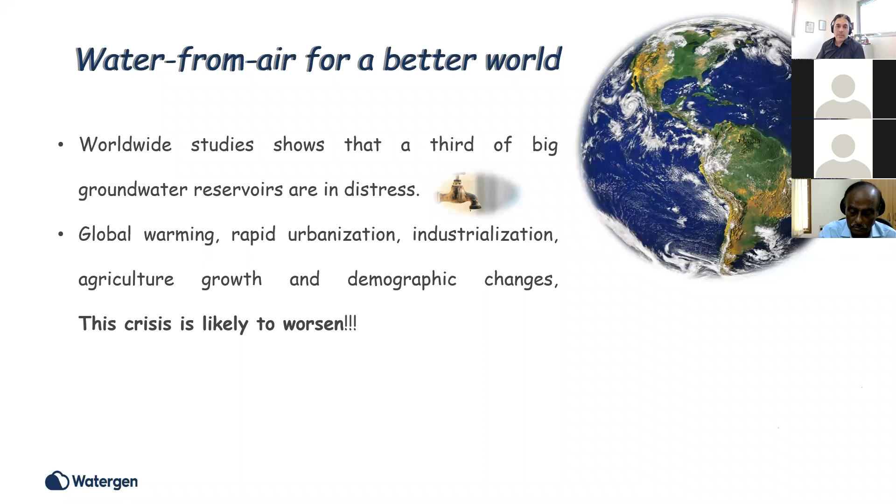This leads me to the presentation objectives. We will overview water sources, and of course we will talk about water from the air, potential hazards in the air, on the ground reservoirs, and regulatory aspects associated with AWG. We will speak generally about different methods of AWG technologies, and finally we will talk about customizing water upon demand.

So let's briefly scan the conventional sources of water we all take advantage of. You probably know that 1.7 million people die annually of water-related disease, and this is very unfortunate information. This finding is not surprising given the problem we addressed just now.

As we speak, natural sources of potable water mainly include mineral, spring, and artesian water. As we already agreed that these sources are distressed, in the last 25 years people increasingly rely on purified, desalinated, deionized water as their source. In fact, these sources are becoming controversial as a result of carbon fingerprint and salination of ground sources. Still, including purified water as an additional source, a third of the world nowadays consumes unsafe water.

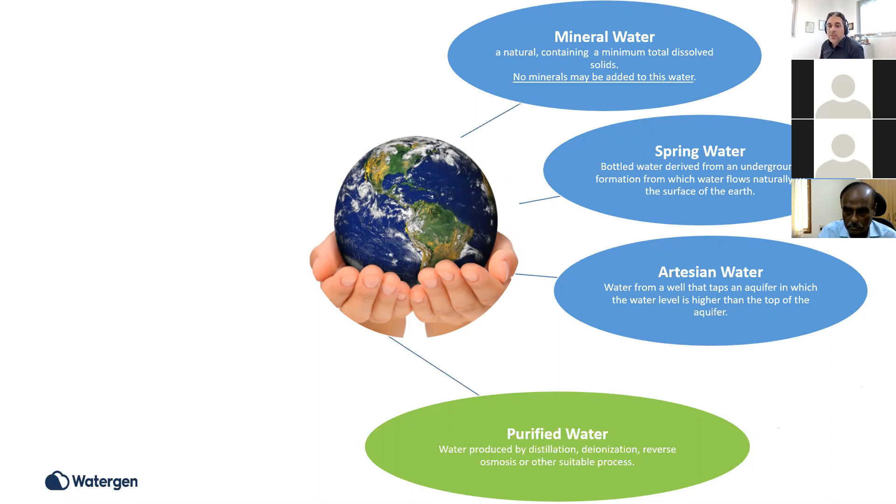So what else can be done? The solution relies in the atmosphere. This available and important source is part of the hydrologic cycle that we can use for humankind's benefit. So to better understand this part of water from air, let's first talk about the magical hydrologic cycle.

The hydrologic cycle is the continuous movement of water in the air, on the surface, and below the earth. This dynamic process allows, at any time point, some estimation says that it's 13,000 cubic kilometers of water at a given time point.

So given the balance between the water above and the water below, we can get a steady state in our atmosphere of renewable fresh water.

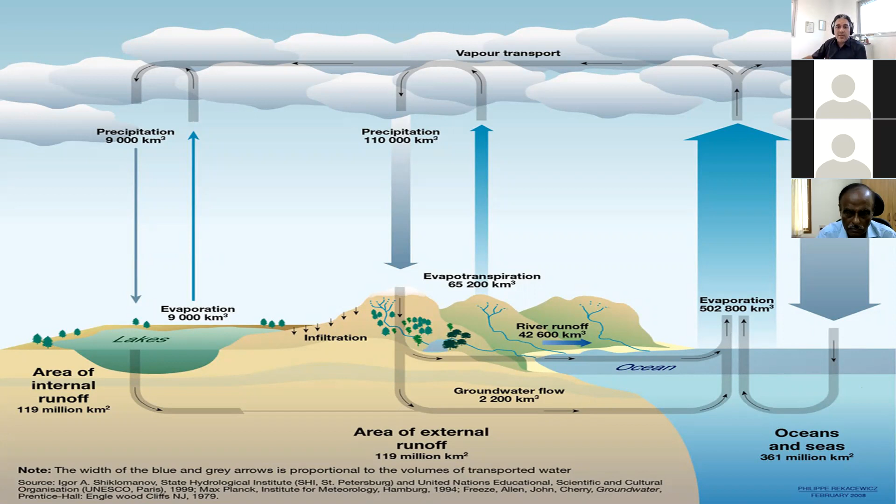Please pay attention also to the fact that the earth acts as a gigantic distiller, and therefore it's obvious that the amount of contamination in the humid air is low by several orders of magnitude when compared to the pollution coming from surface and ground reservoirs that continue to accumulate contamination. So allow me to highlight these three important aspects before we go.

So the advantages of atmospheric water are very low accumulation of pollutants. This is a cleaner source. It's a renewable source, and it has no effect on other water sources on the ground.

So from a strategic point of view, several years ago, Watergen globally surveyed the need.

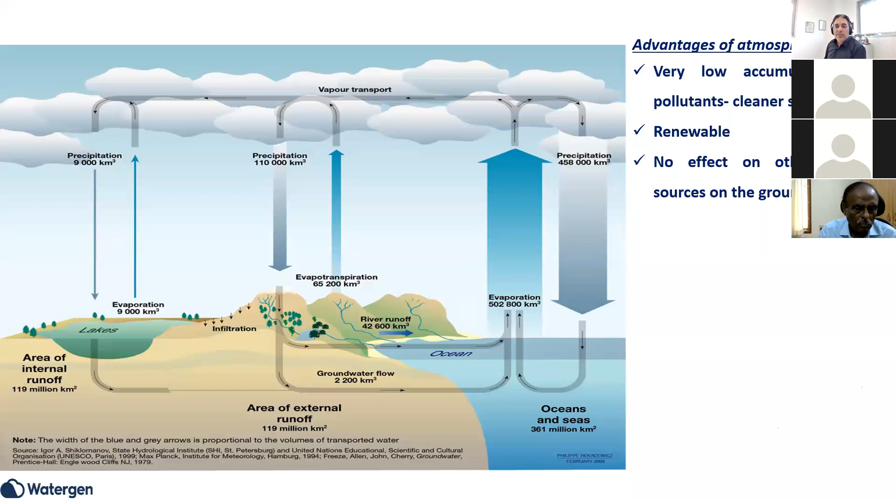I'm sorry, do you hear background noises? Okay. Yeah, we can hear you, no problem. But there is some interference in the background of my noise.

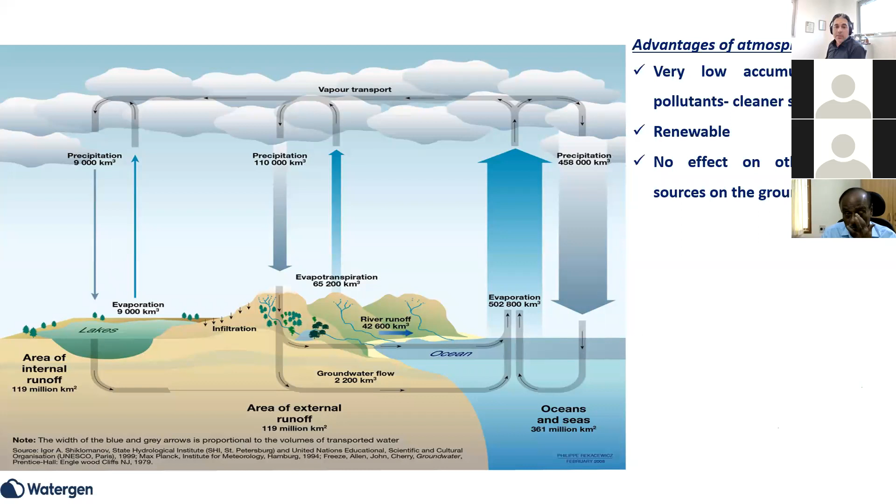Never mind. From the strategic point of view, several years ago, as I just said, Watergen globally surveyed the needs for AWG. The surveys also included technological gaps between different water sources.

So the pollution is low, of course, while producing this device and while this device is working. In the case of tap, RO, and distillation, it is also low. However, keep in mind that there is a lot of infrastructure surrounding this whole case, and it leaves a carbon fingerprint. In addition, in RO desalination, the byproducts of greenhouse gas emission are relatively high.

In terms of water quality, all systems are high in quality. However, it's high in quality in the other sources especially when it goes out of the facility or the plant that treats this water. The infrastructure is the problem, because in the infrastructure you have welding, old pipes, deposits of organic materials inside, and deposits of byproducts of disinfectant that are administered into the system.

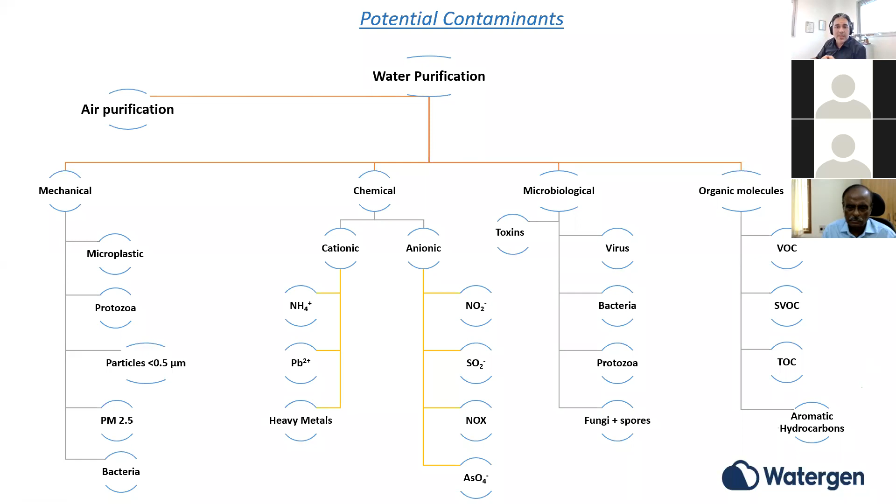We can find them seldom in places where the infrastructure is not treated well. However, we don't know what is the fate of AWG in this case, because we are collecting water from the air. Therefore, the next mission was to locate a list of contaminants that are associated with air pollution, and we went to the WHO list for that.

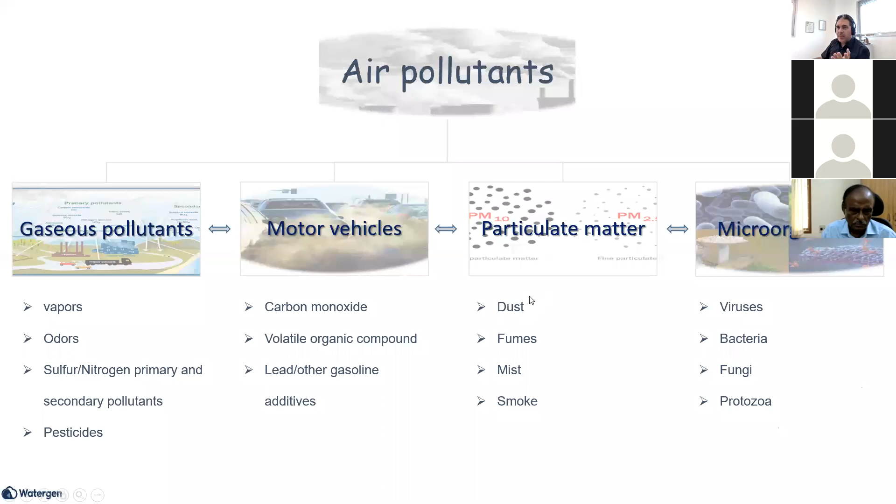According to the WHO, we sort contaminants into 4 major groups to keep it simple: gaseous pollutants, motor vehicle emissions, particulate matter, and microorganisms. Just as examples for each one, but pay attention to the fact that every group is connected to one another. For instance, dust is a vehicle to carry viruses and bacteria. It's also a vehicle to carry volatile organic compounds. The same thing applies to fume, mist, and smoke.

So the question that still remains is understanding the route of contaminants and its significance on potable water, which is still a conundrum in our case.

However, when dealing with AWGs, we have to define this framework differently, with special attention to these 4 major groups as far as I see it, which is the water safety related component finally monitored by the end point user. As an example, I believe many contaminants that are very likely to be found in the infrastructure of municipal or other systems are not necessarily related to AWGs. We'll discuss this later on.

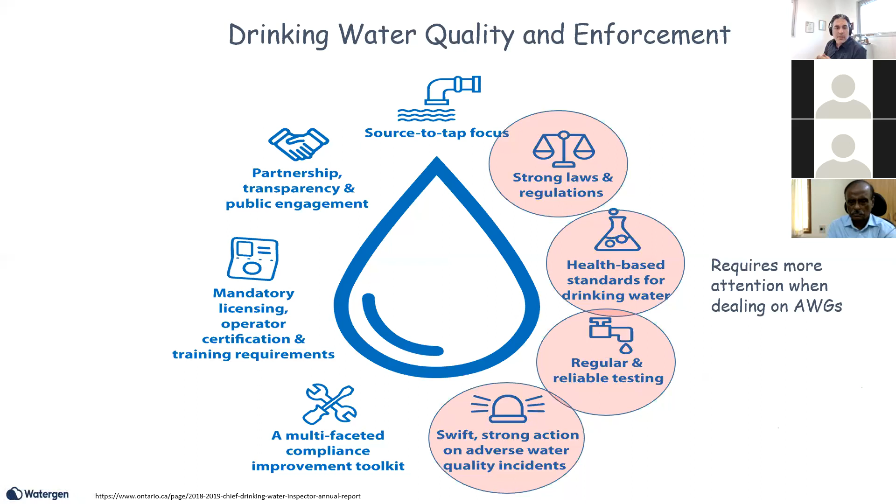And of course, there must be a real-time alert in the system to notify the user of any alarming issues that may appear. The next step was

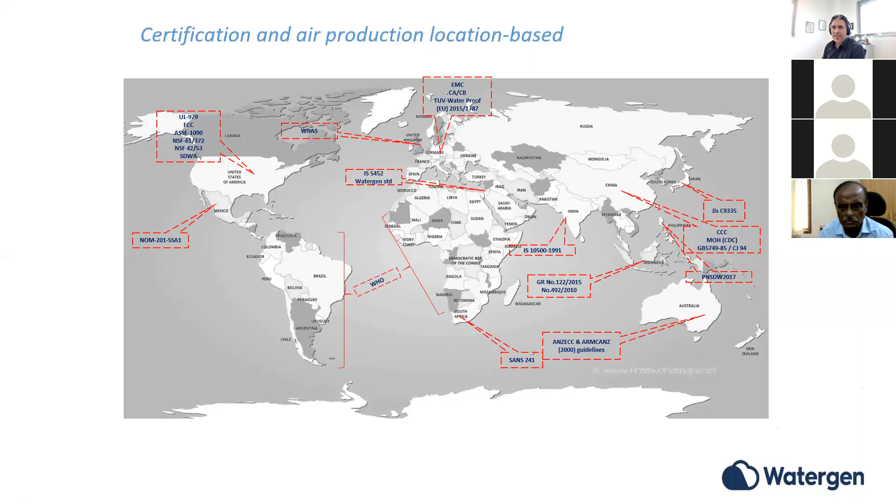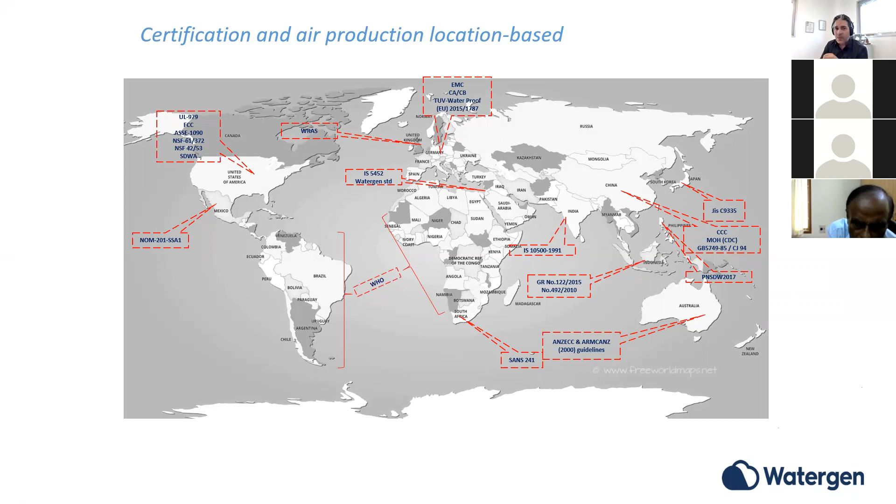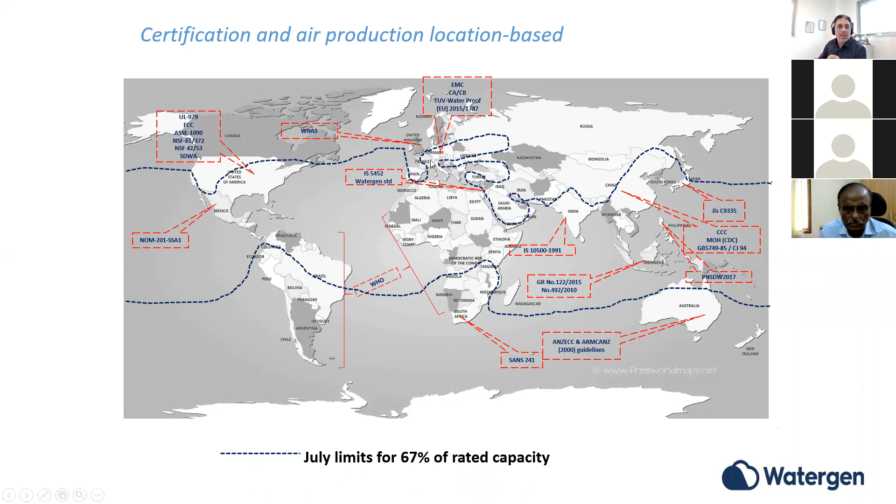to map the whole world in terms of standards. Generally, most countries align their water safety standards with international common standards, though some local variations can be found. This is very important because this finding gives us perspective about what contaminants are more abundant in certain areas. Therefore, we mapped the whole globe with specification to the area between the latitudes that allow water generation in summer and winter.

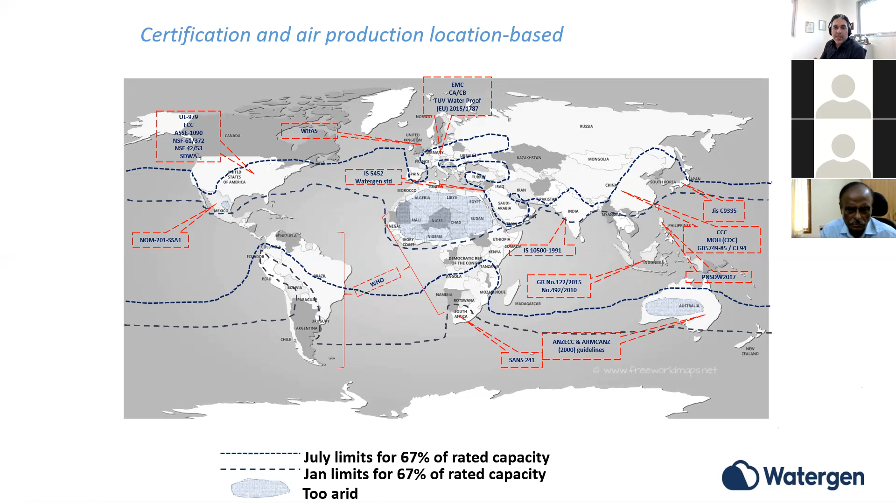We also paid attention to places that are too arid for AWG activities. So please note that our attention was initially given to places where AWG works. Finally, we ended up with a list of stringent requirements we call Watergen requirements, which serve as a thumb rule to approve our devices.

In addition, a lot of our attention was given to pollution, because of the different behavior of contaminants on the ground versus in humid air. For instance, to emphasize what I mean, heavy metals such as lead appear in different metallic or ionic forms on the ground versus organic compounds in the air. So the solubility is different, and this must be considered when thinking about regulation in the case of AWGs.

Another issue is bacteria on the ground or in reservoirs versus bacteria in the air, or other microorganisms in general. They may be significantly different and versatile on the ground versus the air. Therefore, it should be taken into account.

For instance, let's say we are now addressing the demand for tests. We have to think about what is the significant microorganism that best represents the conditions for AWGs as an indicator. And finally, as we said before, contaminant concentrations are completely different.

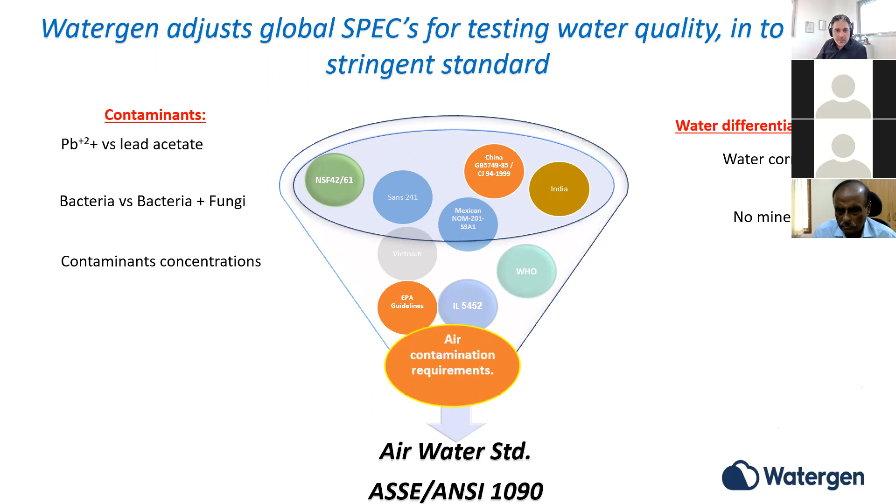A closer look at the standards reveals up-to-date knowledge related to AWGs and water safety, focusing on highly relevant aspects. We can see many aspects associated with safety, health effects, aesthetic effects, and more. But let me outline three relevant aspects that are new in this standard.

The first is oils, because most of the technology is based on mechanics of heat exchangers. These heat exchangers come from the metal industry, and they very likely have oil residues that in some cases can be toxic or unsafe for consumption.

Another issue addressed in this standard is corrosivity, because the water is corrosive as long as the machine is working. This corrosiveness may affect some wetted parts in the machine. Therefore, these parts must be tested carefully under certain conditions of acidity to approve their use in the AWG machine.

The last thing, and a very interesting one, is the energy efficiency, set by the standard to 3 liters per kilowatt hour, subjected to 60% humidity and 27.5 degrees centigrade. This is really about energy consumption, and many researchers believe that energy consumption is the Achilles heel of the system.

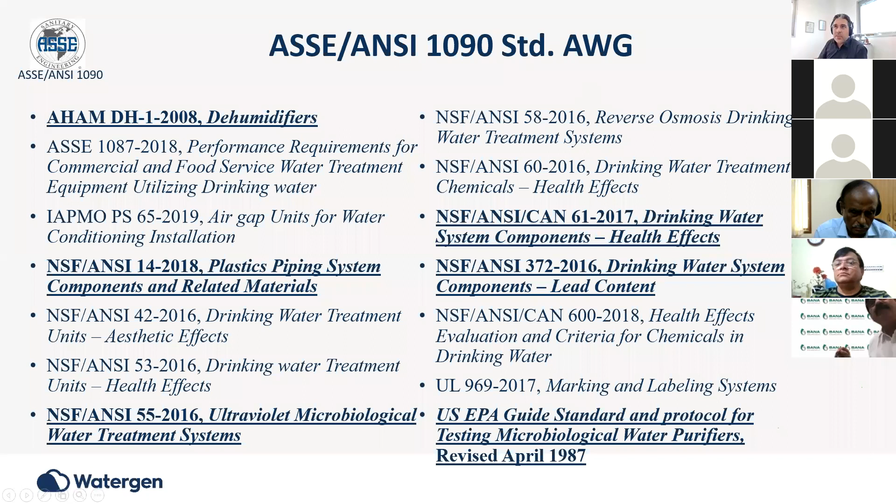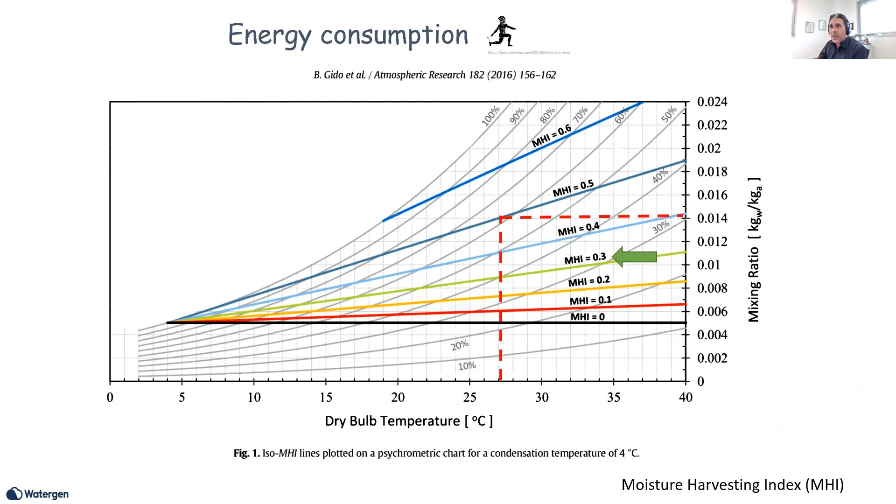Another important issue addressed in the work of Ben Gido and his group is related to the smart management of energy. To be efficient in water production, an AWG must work according to favorable conditions, which seems very reasonable, operating in different intervals depending on location and time.

Altogether, this also raises questions when dealing with standards. This means the system will encounter many stagnation points, and the way to treat the water in order to prevent biofouling is crucial when designing such a device. This should also be addressed when thinking about standards associated with water safety.

So with this knowledge in our toolbox, let's move on to the principles to consider in planning AWGs. I'm sorry, you probably noticed I made some changes to my presentation along the way. To better understand the principles, let's take a look at the big word we call AWGs, atmospheric water generators.

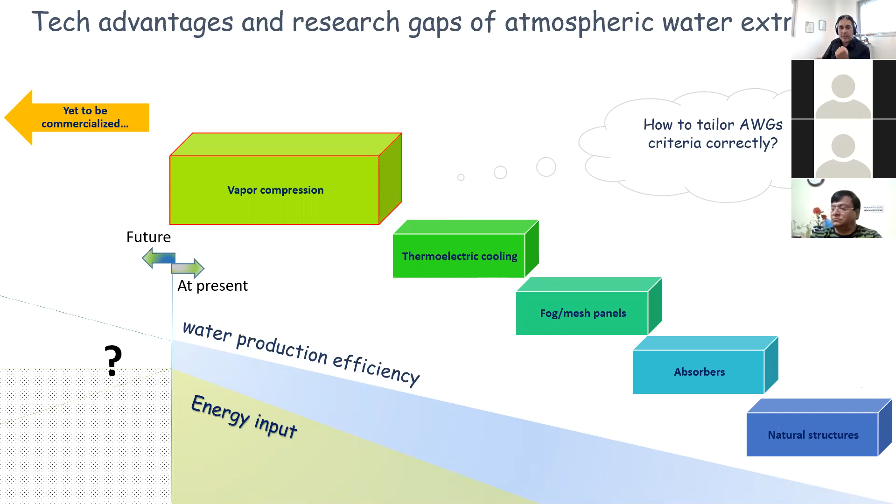The question is, when we understand that vapor compression is the major potential we currently have at market, how do we tailor the AWG criteria correctly? With this understanding, let's move on to the criteria related to vapor compression design.

We collected several aspects that relate to each other, starting with environmental conditions that must be taken into account in system design, such as air temperature, relative humidity, and dew temperature obtained from given environmental conditions. This also affects production planning, which will be carried out according to available weather, exactly as the group of Ben Gido showed in their work.

These aspects are all dictated by safety. As we mentioned, approved raw materials must be free from harmful chemicals, and all matrices must comply with corrosive water resistance. A safe production environment is a very important issue.

This is important for keeping the machine safe. As we know, most machines will be stored for long periods at times, and biofilm or other problems can grow in the machines. Therefore, a safe manufacturing environment is very important.

And of course, real-time alerts are needed to notify the user that something went wrong. As an example, there are also limitations to the vapor compression mode itself, because under 9 degrees it's not sensible to produce water, since the gas may freeze and there isn't much water in the air.

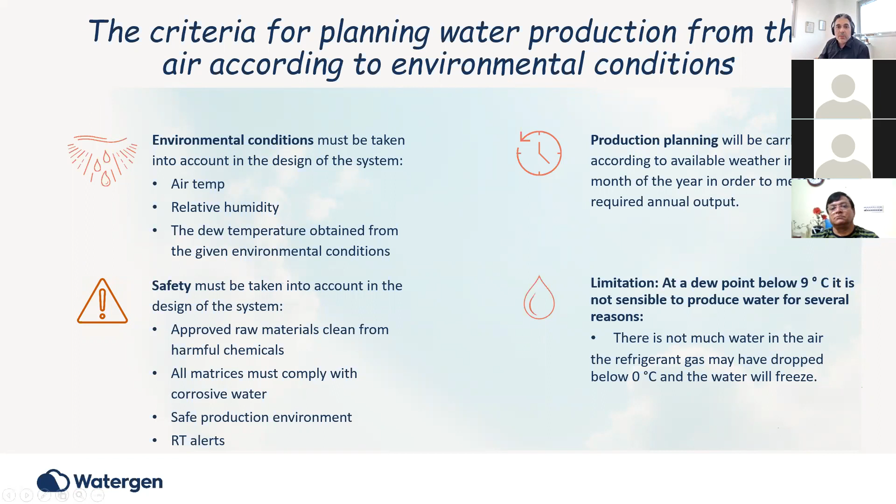So another aspect of the principle is regulatory adaptation. We already agreed that the basis for device safety has to include ANSI 1090-53 for health effects, 42 for aesthetic effects, and NSF 61.

There are some differences between conventional systems and what we expect in the future as our knowledge grows. In terms of material safety, according to the ASSE, oil is an important issue. Also, corrosive water and water extraction testing of devices is very important.

In terms of filtration, most conventional filtration today is based on municipal water or similar systems. This doesn't necessarily address the problem of devices operating in natural environments affected by human-related byproducts. In natural sources there are NOx, SOx, heavy metals, and organic molecules, and in human surroundings there are pesticides, herbicides, heavy metals, and so on.

As we addressed before, understanding what portion of these elements goes into the water or into the machine, and how it's handled, is very important. Therefore, special filters must be designed based on research that we and others do all over the world.

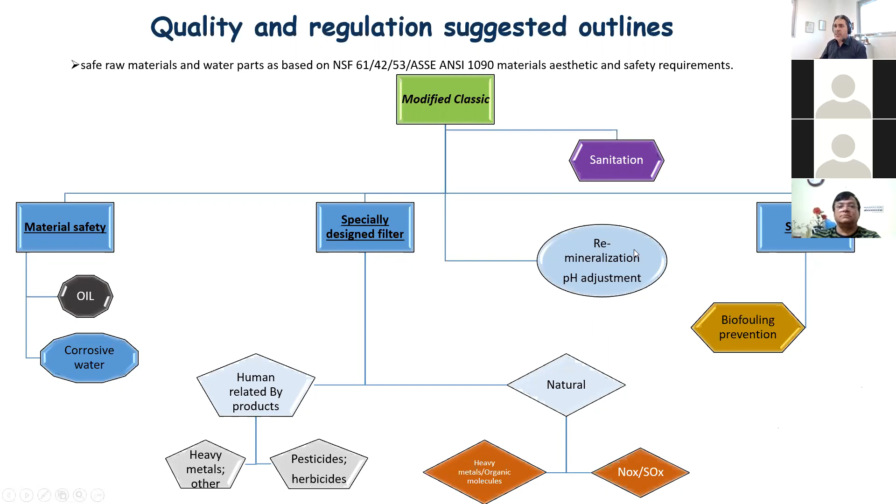Two other important things I'd like to address are sanitation, and remineralization with pH adjustment. Since this system is standalone and not constantly fed by disinfectant like municipal systems, sanitation is a vital part of maintaining the machine and keeping it safe. It's also easy to dispense sanitizers since the system is standalone. Remineralization and pH adjustment we'll discuss in the next slide.

So given that AWGs harvest distilled water, adjusting the water to human physiology is not only about odor or taste, but also, and more importantly, about cellular function of our body. It is crucial to add certain minerals. For instance, calcium can be added using a bicarbonate cartridge to adjust pH. I believe in the future other elements will be available to add on demand, such as magnesium and other elements found in bottled water.

Eventually, adjusting the pH to between 6.5 and 8.5 according to the standard is very important. The other thing I would like to address is sanitation, which is affected by the atmospheric and dynamic environment.

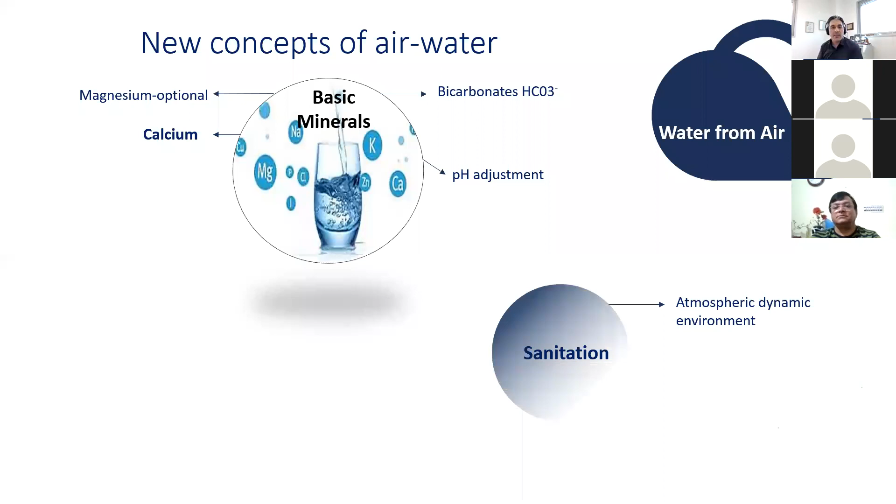The differences in the air in a rural country, industrial zone, by the ocean, or in an urban area may completely change the flora of molds, spore-forming bacteria, viruses, and organic compounds in the air that can potentially go into the device and affect sanitation by hindering it.

Byproduct is another important issue in the case of municipal water. However, when we sanitize a standalone device, it's very easy to rinse out and get rid of byproducts that normally accumulate inside infrastructure that works for several years and is kept fed with sanitizers. There's always the unknown behind the corner that we are seeking and looking for to keep our devices and all AWGs safe.

The next issue is research, which is a very powerful tool in new product development. In order to minimize the unknowns as much as we can, through our in-house research together with collaboration with academic-based research, we significantly accelerate our understanding of AWG function in different environments.

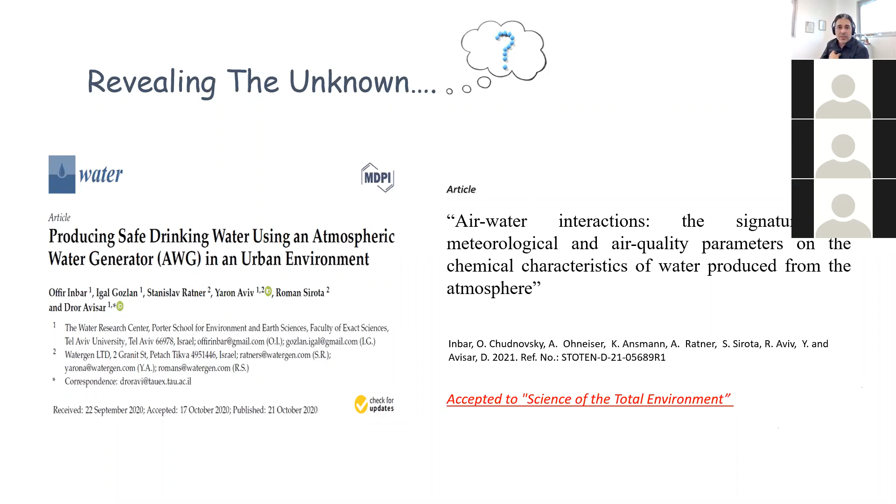Microbial investigation is another important issue to emphasize. We have here a machine that came from Mumbai, India to Israel, where we collected water from the internal part of the machine before filtering the water.

The devices were collected as outdoor or indoor devices from different places all over the world, and also in places in Israel. I'm very pleased to say that we couldn't see any significant pathogens such as Salmonella, Legionella, Listeria, or other harmful pathogens in the device. This means they are less likely to be present in the humid air.

This also emphasizes important aspects that we know how to handle when we design a device. So I would like to summarize this presentation now and talk on two different levels: the environment, and the device itself. Environmentally speaking, the devices are eco-friendly and utilize green energy. This aspect will grow, I believe, much more in the future.

The source itself, humid air, is an unlimited and renewable source. The air source is much cleaner, we all understand that. The device itself is a safe platform, easy to install. Water transportation is not needed because it's standalone and put in place on site. It's infrastructure independent, although some customers prefer to add local infrastructure for fountains and storage tanks. This is also possible. And it's low maintenance and mobile.

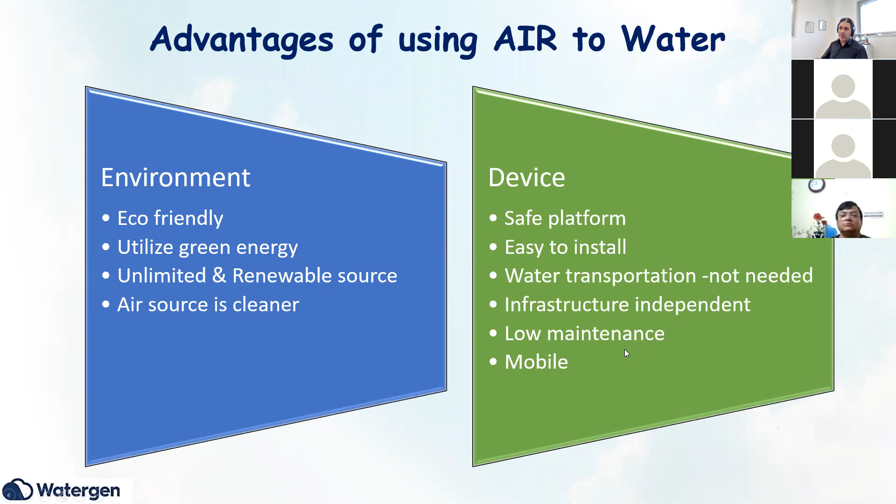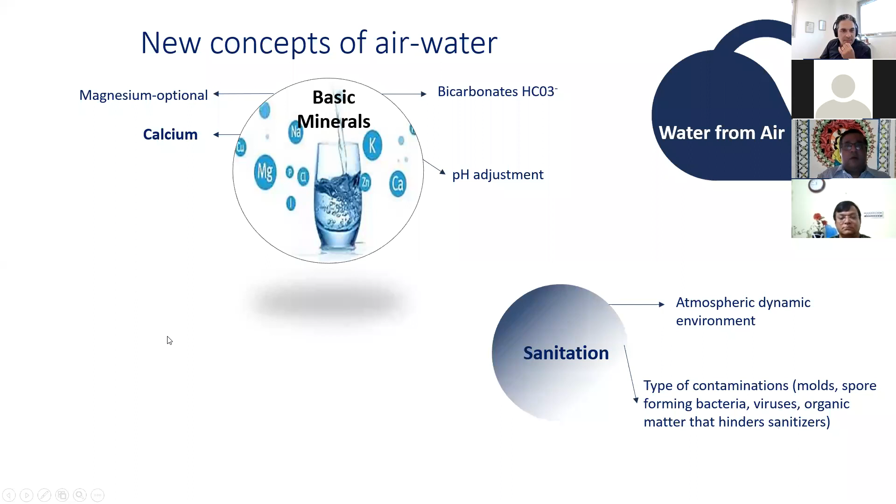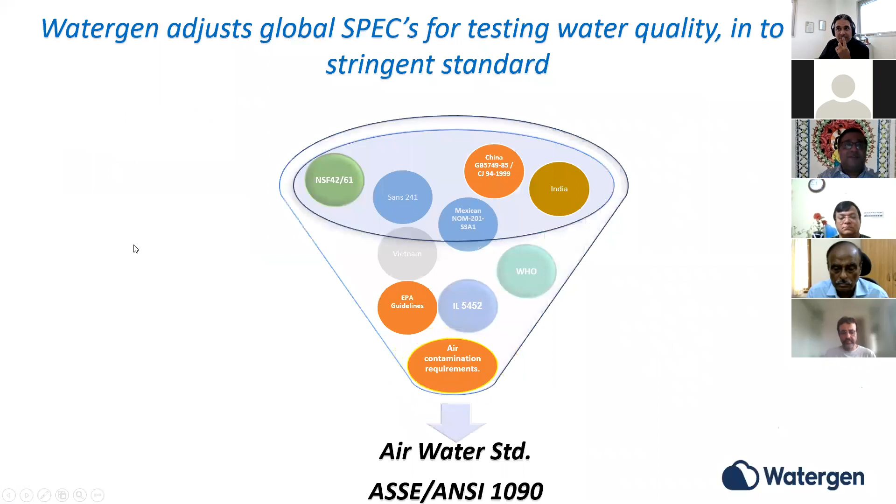So thank you, Dr. Aviv. It was a wonderful and very lucid presentation. I think you captured very nicely each and almost every aspect of air to water, which I know my members have fairly good knowledge of, but I don't think they have such deep knowledge on this subject.

Before opening the forum for discussion, I would like to ask a question about how different sizes of AWGs are available. These AWGs, primarily my member companies are residential water purification systems mostly, so probably they are interested to know about this, and also maybe some commercial systems. Can you throw some light on this?

Yeah, we have different panel of systems starting from home and offices, GENNY 3, which generates up to 30 liters a day. It also has the option for cold and hot water for small offices, for small homes and offices. Also, we have the Gen 350 and a modified version of that, capable of generating somewhere between 350 to 600 liters per day, and it's equipped with a water tank inside the system.